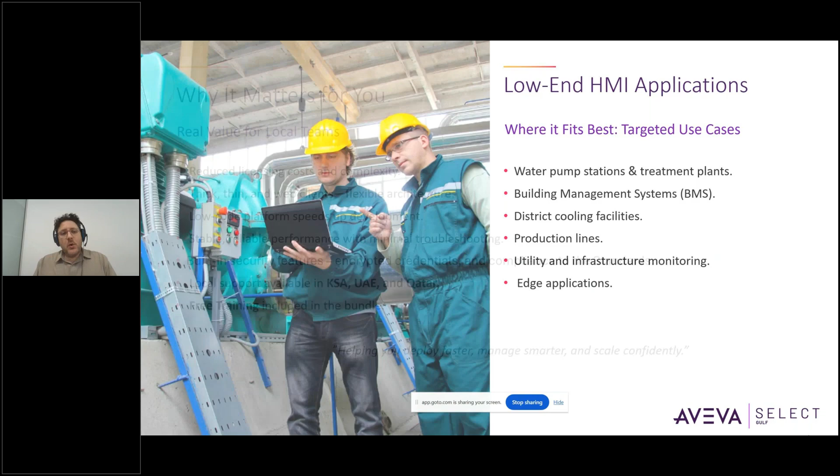So why does it matter for you? As we discussed, we have reduced license cost and complexity. You have a flexible architecture with thick, thin, and web clients, and a low-code platform to speed up development. InTouch, everyone knows InTouch, how reliable it is. You have stable, reliable performance with minimal troubleshooting, built-in security that is approved and up to date with the standards for every version. And we have local support available in KSA, Saudi, Emirates, and Qatar.

Plus, we have free training included in the bundles. This is a new announcement we are doing with this bundle.

Now let's talk about the demonstration. I already have a server here. I will demonstrate a few things. So first of all, let's go like the old one to the Application Manager. In here, we will look at it.

The first thing you can find is a little bit of modernization in the system. And if you go to Tools, you will find Security, Credential Managers, Node Properties, OPC UA. Those are some of the new features.

Talking about security, if you click on it, you will have InTouch Developers and InTouch Operators, with built-in groups, and you can add domain groups or local users.

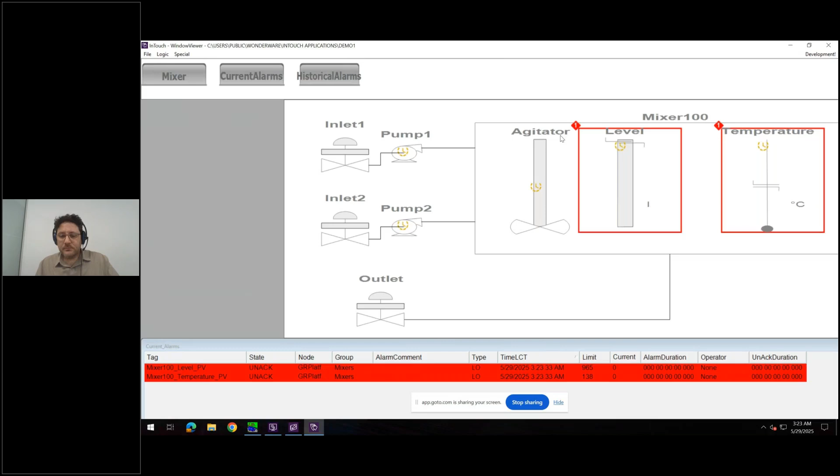Now, the second one, let's open. I already prepared a few things in the demo in current alarm, to see how to work with alarm latching. Go for runtime. Now it will ask, it's a demo, so let me continue. Now, if you're familiar with InTouch and the alarm client control, this is a temperature that has returned to normal, but it's unacknowledged. So in case you acknowledge, let's acknowledge all and put whatever comment, it will disappear.

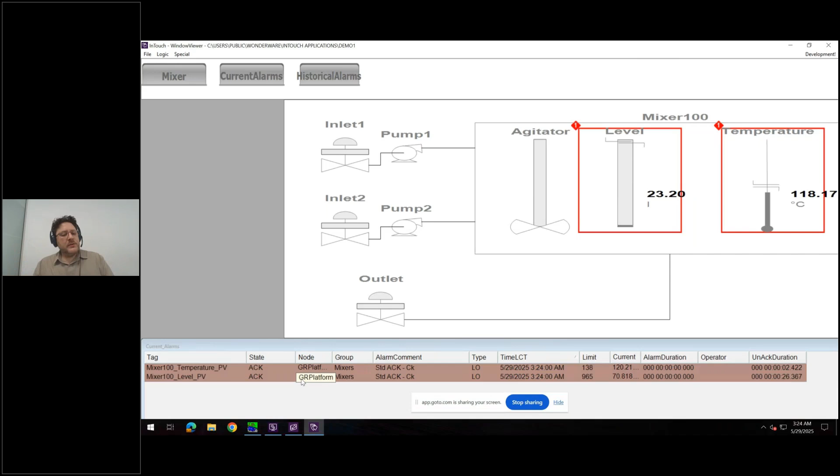Some standards or some clients will ask, we need to keep it there and look at it. This is what we call alarm latching. However, I have to close it all, close WindowViewer, and go to file. Go to configure, alarms, and it's very simple, just alarm latch enabled, save. And you will have here: alarm settings have been updated successfully.

While I'm still here under configure, you have security, the same as the old one, but the good part is, if you go to your credentials, you'll find all the credentials that you put before. You'll find them here. And a simple communication with AVEVA Connect. This is just to mention it in passing.

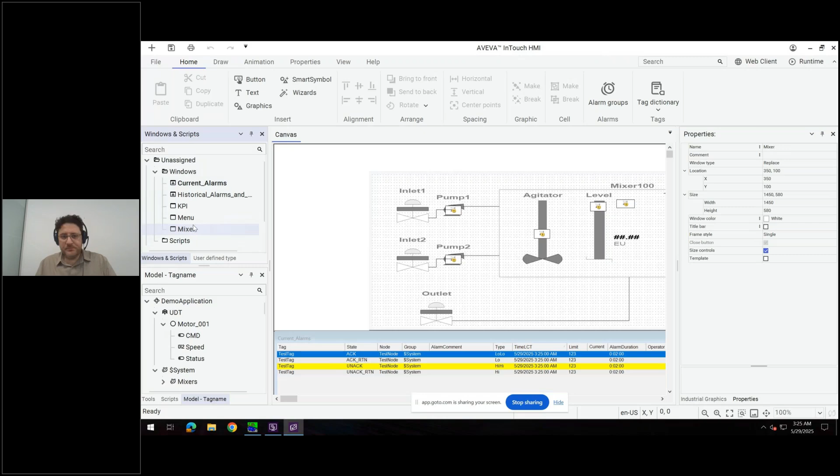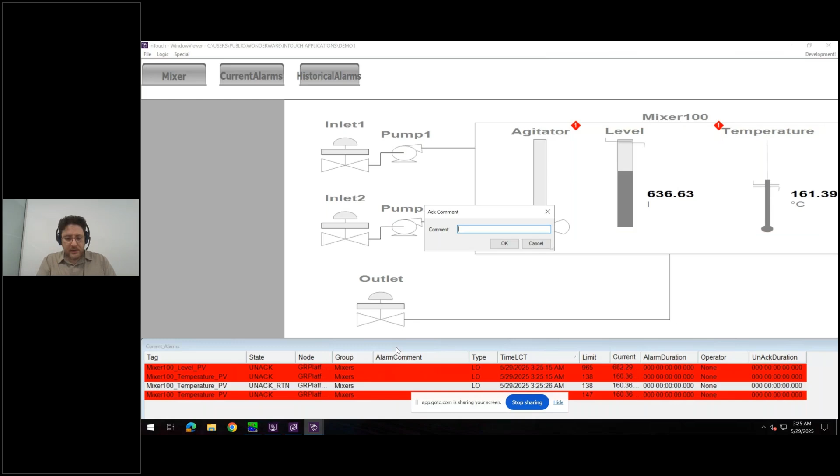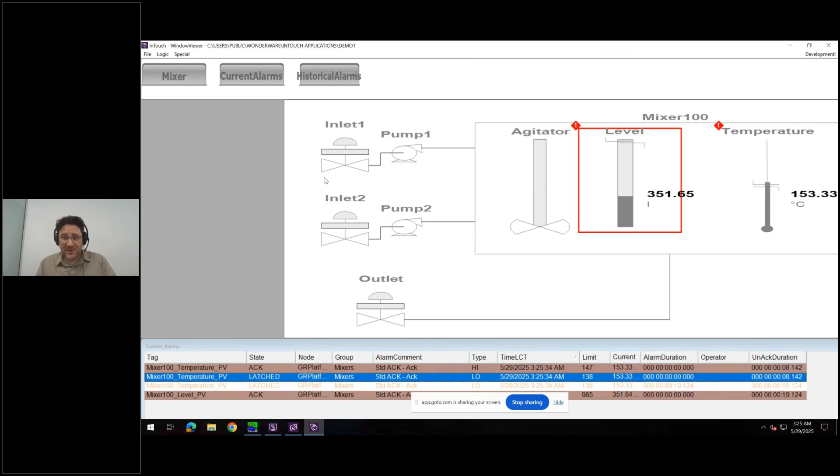So after alarm latching, let me open my current alarm again, mixer, and my menu, and go for runtime. Continue. So I already enabled the alarm latching. I have new alarms here. Right click, acknowledge, and acknowledge all. And let me write here acknowledge. And you can see it's latched. You can see the alarm comment. So if you want to look at the acknowledged alarms, you don't need to open historical alarm anymore. It's there in the current alarm.

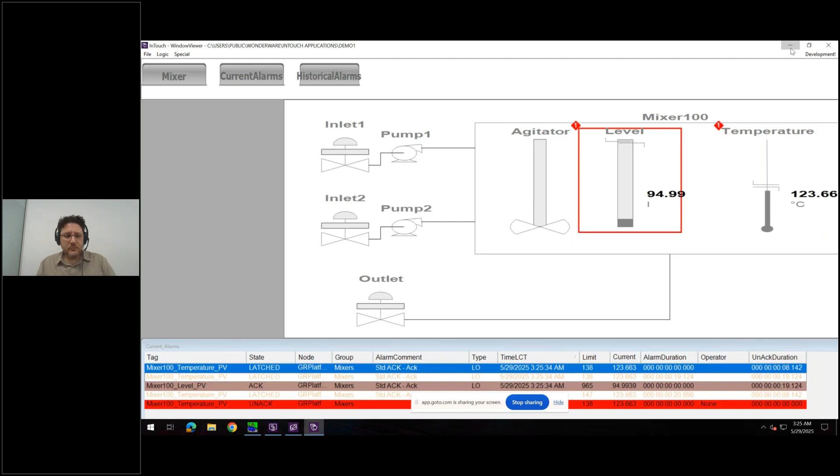This is 2. 3, let's talk about SVG, the scalable vector graphics. I already have a few here. You can find them in Windows, SVG. This is simply to check what icons you need. There are lots of SVGs, you can download them, and use some of them. So I already have 2 here. This pen as an icon, and a bar chart, and I like this bar, I want to use it as a KPI.

How to do it? Very simple. Let's go back to InTouch HMI, going for graphics, and I have here a bar test. It's a symbol that I created, an empty symbol. Let's double click. Okay. The same old symbol editor, but there are new features here.

One of them is here next to graphic performance index, you have import SVG. So let's import the pen first. Let's see how it becomes. It's simple. So the SVG will be transferred to elements, polygons. Every element is like any of the elements in the tool; you can add alarms, animation, and custom properties for it, the same old way. These are the tools. So it converts the SVG to polygons in my system.

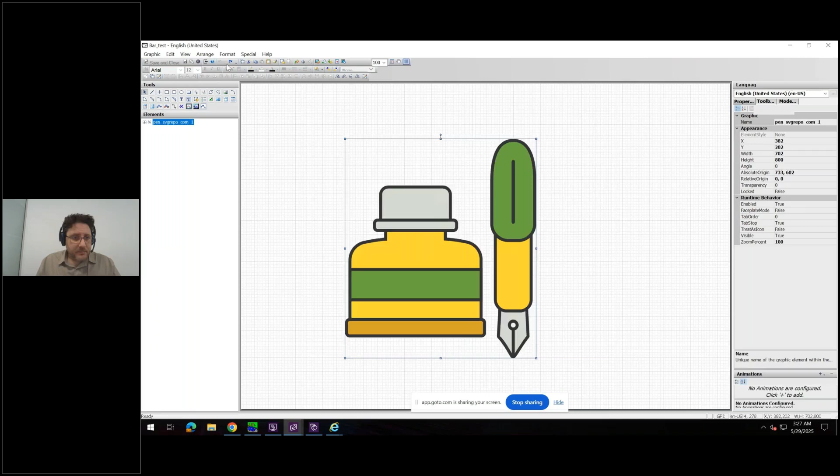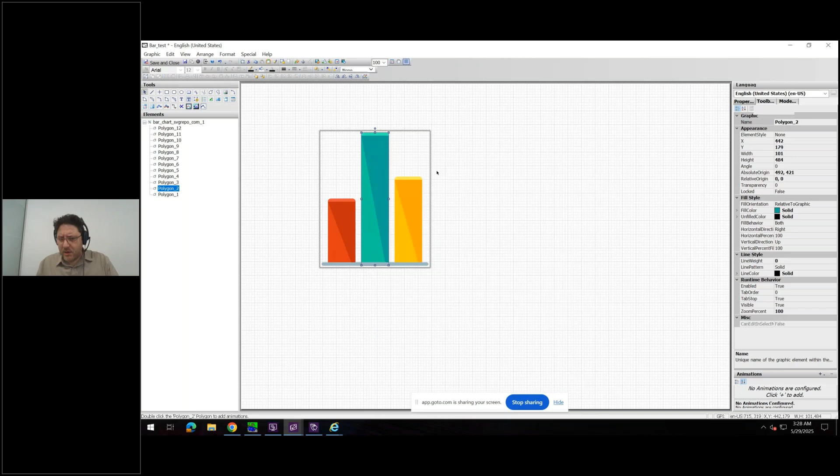Let's see the other one. Actually, I'm sorry, I want the bar chart. And here the bar chart is several polygons. So simply go for an animation related to fill vertically based on a tag, to fill it and to see the KPIs. However, I already prepared one graphic here, which is this one.

Did I double click it? Okay. I have this graphic. It's the same one, but I removed the third row. I only have level and temperature as text. It will show the numbers. And these polygons, the first one is related to temperature.pv. I have it in the mixer. And the second one is related to level.pv. Okay. And that's it. Let's open the KPI.

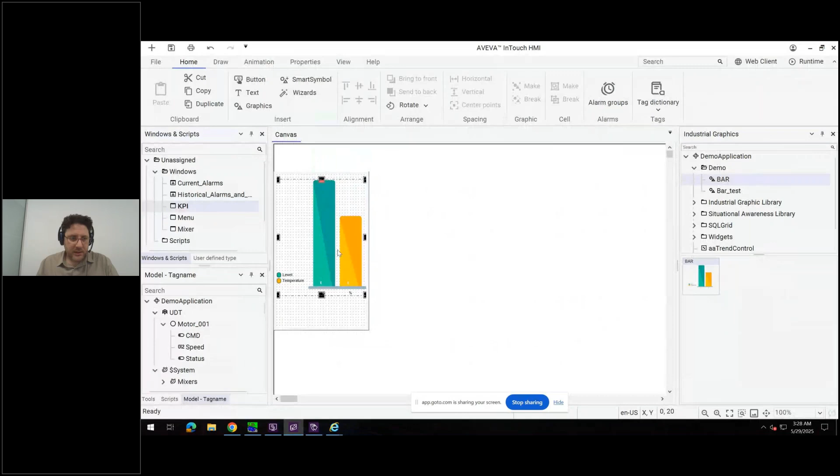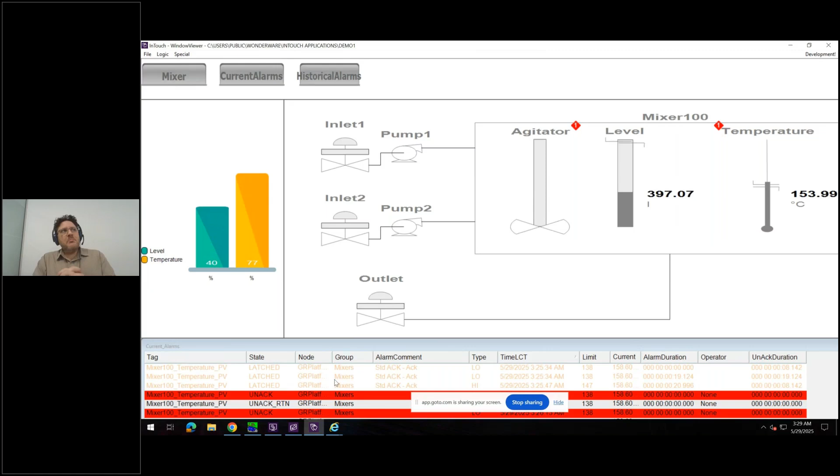This is the same one, the bar that I have, the mixer, current alarm. Let's open it. The menu, go to runtime. And you can see it's working. And the latching is still working here. Yeah. Now, one of the main new features that we talked about today.